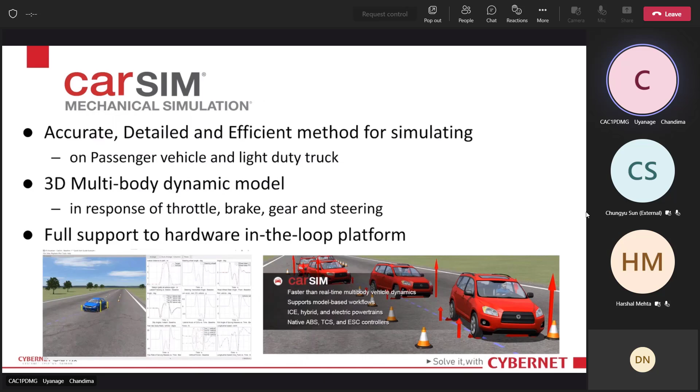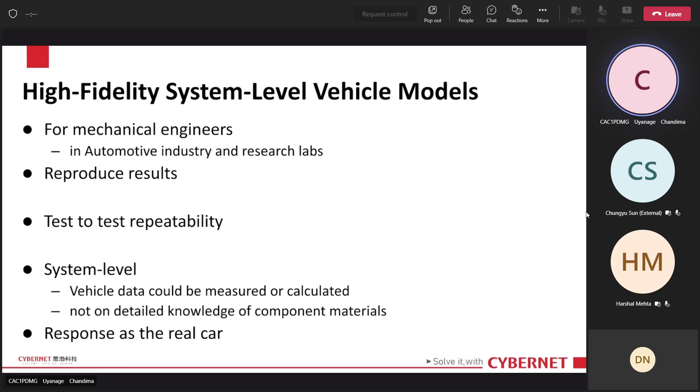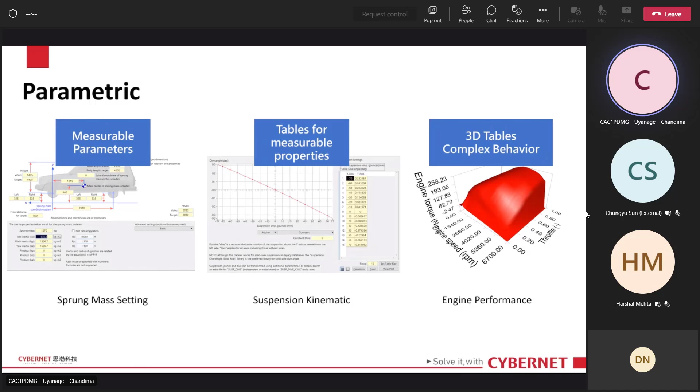Some of the measurable properties could not only be measured by real K&C rigs, but also by programs like ADAMS or SuspensionSim. As we have mentioned, CarSim is for system-level simulation. However, sometimes we have to build up the details of the component. We could use SuspensionSim to simulate the chassis response and import the results into CarSim. We could also duplicate the same testing scenario to validate the data we input to CarSim.

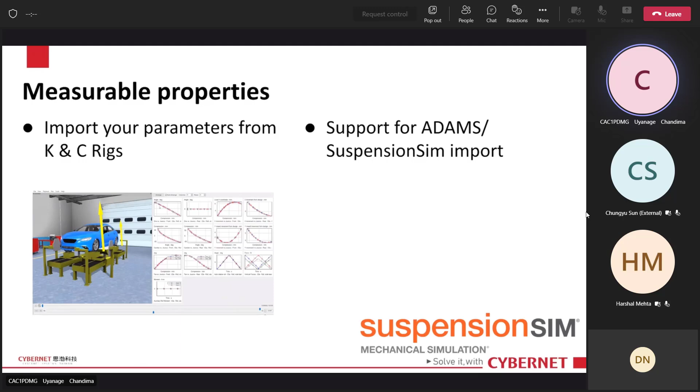CarSim supports almost all kinds of powertrain combinations, such as motor drive EV and hybrid EV. You could use CarSim to implement the powertrain setting and the testing scenario. Use the power management control to decide when to use motor and engine.

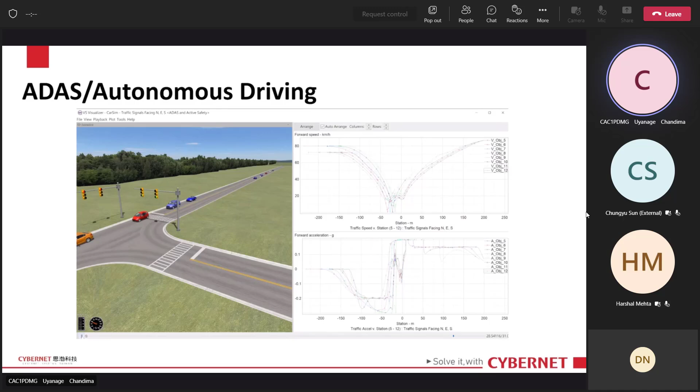CarSim comes with a database that has hundreds of simulations. We have 100 plus testing scenarios. We have about 40 plus vehicle data sets here that are based on a unique vehicle configuration. CarSim has extensive documentation like the help menu. Every screen has a help button. There are about 140 documents.

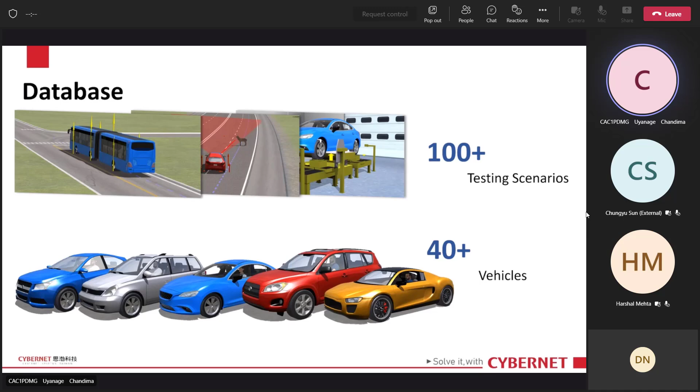Documentation is included in CarSim's reference manuals so that you can easily learn how to use VS Commands. We also have online videos on YouTube to show you how to script VS Commands. Events allow us to set up the scenario step by step, using pending events to trigger each step of your scenario. That could also help us to verify whether the test passes or fails.

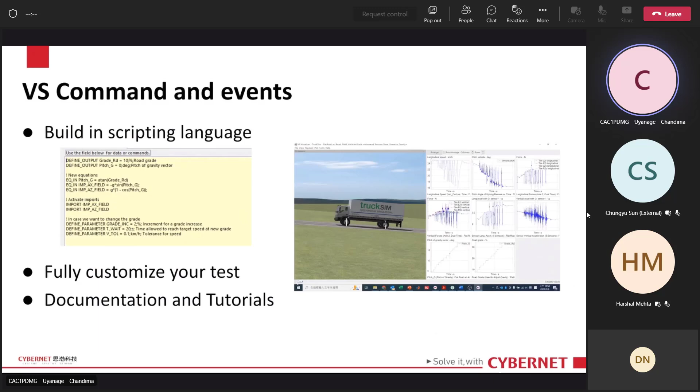CarSim, TruckSim, and BikeSim are used worldwide by over 100 OEMs and Tier 1 suppliers, and over 200 university and government research labs. There are more than 2,600 active CarSim seats, not including driving simulators or students.

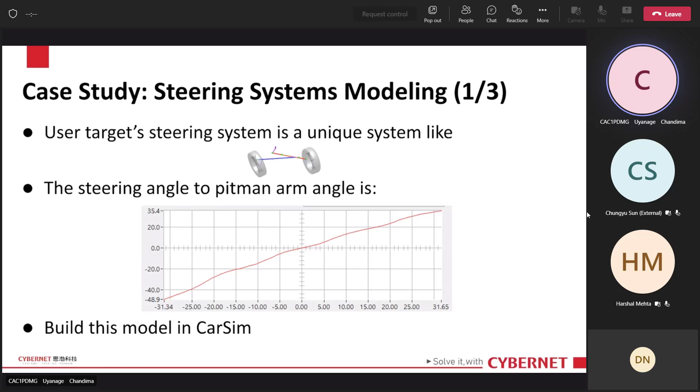After modeling, we test this vehicle with a vehicle dynamics test, a static steer test with brake on. The procedure is the vehicle is static with brake on, and we rotate the steering wheel smoothly. The brake will make sure that the vehicle will be static in the longitudinal axis, so that the torque in the axis will have a bigger impact.

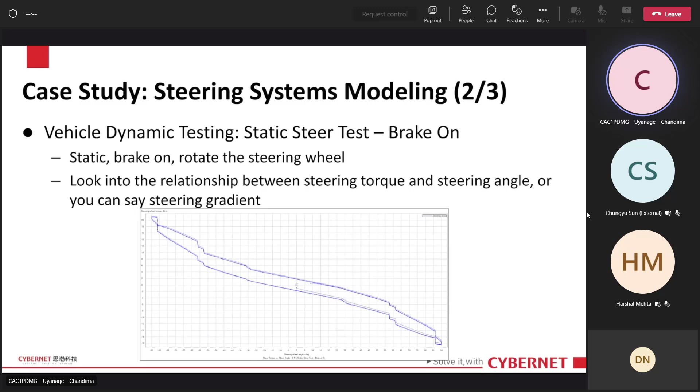You can see from this graph, the x-axis is the steering angle and the y-axis is the steering torque. The key point is the slope between steering torque and the steering angle. In vehicle dynamics, we call it steering gradient. The steering gradient will show whether the steering wheel is good to drive. As you can see, we have lots of rapid increases or decreases in steering gradient. This makes the vehicle hard to drive.

For a customer who is starting an autonomous vehicle, this helps them find the problem. They knew that the steering system was very hard to control for their controller, but they never found that the problem was from the bad steering system. We help users compare to their target, find this problem, improve it, and solve it. It helps them reduce the time in the end.

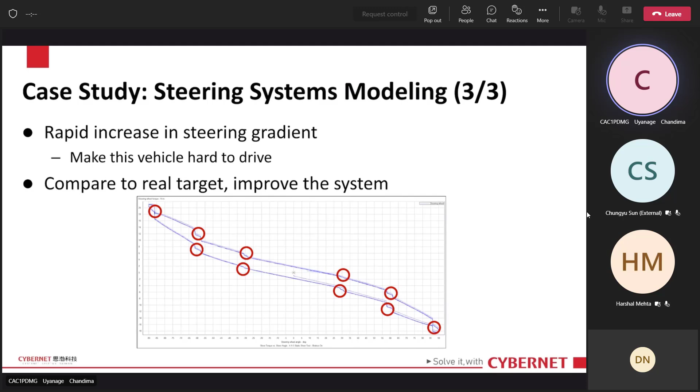The next case is the planning. Pirelli used CarSim to test a new tire model. There are two testing procedures: with the same distance to compare the fuel consumed, and with the same throttle command to compare the travel distance.

We can imagine that if we want to test this in the real world, we need two teams to maintain the vehicle condition, doing their best to make sure the vehicles show no difference except the tires. At the same time, these two vehicles will always have some differences. For example, the engine will differ since the mileage is different. The test environment cannot always be the same. Sunny day, rainy day, dry, or wet can have an impact on the testing result.

All of these variables can be controlled in simulation. We can have a totally identical vehicle except for the tires in CarSim. The simulation difference is fully a result of the tire model's difference. They use CarSim to save lots of human costs and vehicle maintenance.

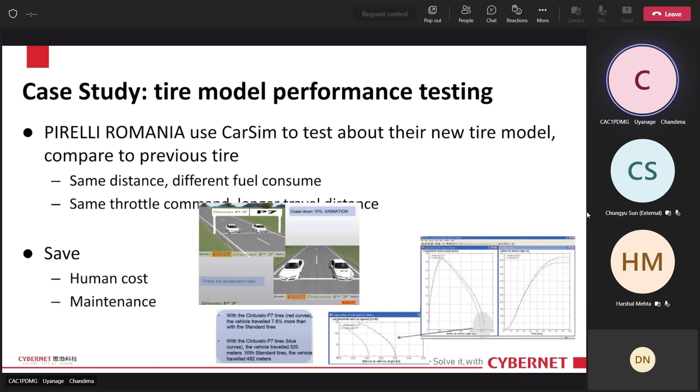What we have introduced in previous slides is software simulation. Testing a controller with software is something we call software in the loop. However, we still need to put our controller on hardware and test it with a real vehicle. Testing with real hardware is something we call hardware in the loop. It not only tests the control algorithm, but also tests the communication interface.

Before we dive into hardware in the loop, let me introduce model-based design. Model-based design is a method used in controller development and testing, based on the response of a plant model. It's also used in various industrial fields, such as aircraft, power grid, vehicle battery, and so on. Model-based design is used for product evaluation, system integration proposal, controller design, and development.

We can say that basically everything in the world can be a plant model. You could develop a controller using model-based design. Okay, now we have a new name, plant model. I will explain what a plant model is in the next slide.

What is the plant model? I assume that everyone here knows that force equals mass multiplied by acceleration. If I put a force on a mass body, it will have a specified acceleration. That mass body is our control plant model. If the model is accurate enough, we can know the acceleration value at any time. We can develop a controller to control the acceleration value based on the mass equation.

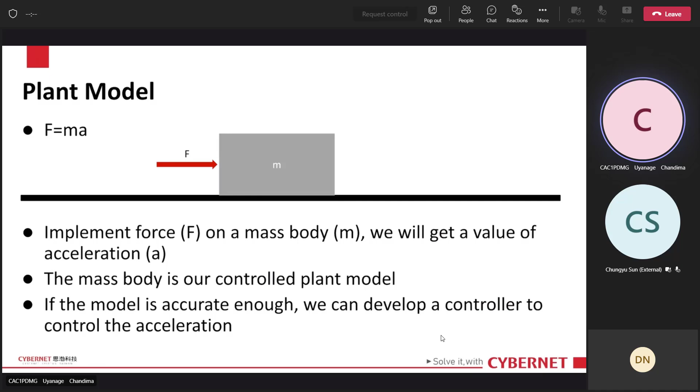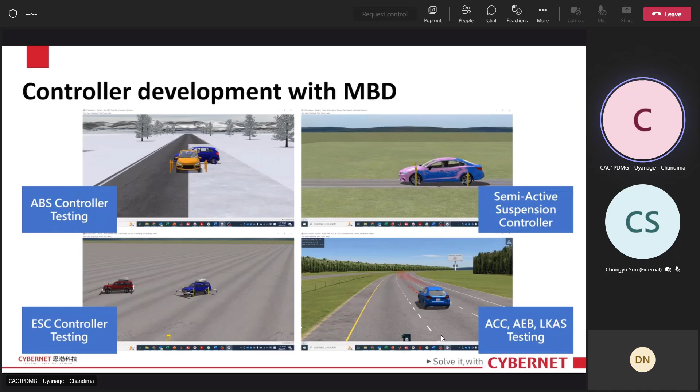By using model-based design in CarSim, we could build up a lot of controllers, for example, ABS controller, semi-active suspension controller, ESC controller, and ADAS controller. As you can see in the video, most of these controllers are required to be tested and pass dangerous situations: rollover, loss of control, difficult road situations, or obstacle avoidance. Controllers need to be tested in these situations to ensure performance. Using MBD and CarSim helps you test in the early stage with low cost and save money.

However, if we just test our controller in simulation, there will be some pros and cons. Of course, with simulation we could do control algorithm verification. The controller could be tested at a very early stage, and this is what we call software in the loop. However, the real controller has some physical limits. For example, the CPU has limited calculation power, and the sample rate is limited by both the hardware and the communication protocol. At the same time, a real controller will be impacted by noise. Automotive engineers should do lots of hardware testing to make sure the controller can be used on the real vehicle.

Now we have a full view of simulation versus real testing. For simulation, we have a safe testing environment. The testing is quick and can be done at a very early stage. Software in the loop is much cheaper than real vehicle testing and can be done in a lab, running 24 hours per day. However, some of the requirements are assumed ideal, like communication.

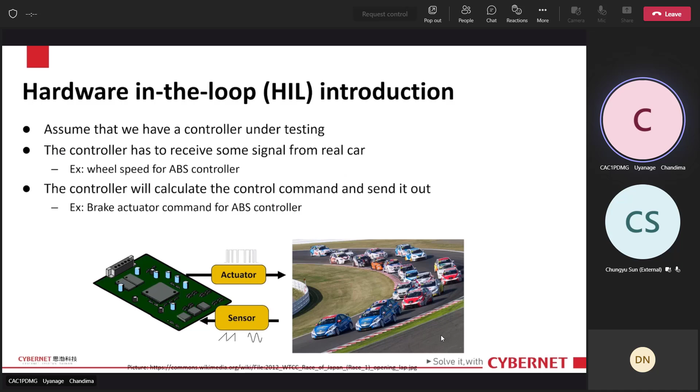The hardware in the loop, also known as HIL, is a controller design and testing method. Let's assume that we have a controller under testing. The controller has to receive some signal from a real car. For example, an ABS controller will have to get the wheel speed from a real car. Then, the controller will calculate the control command and send it out, just like the ABS controller will send out a brake control command.

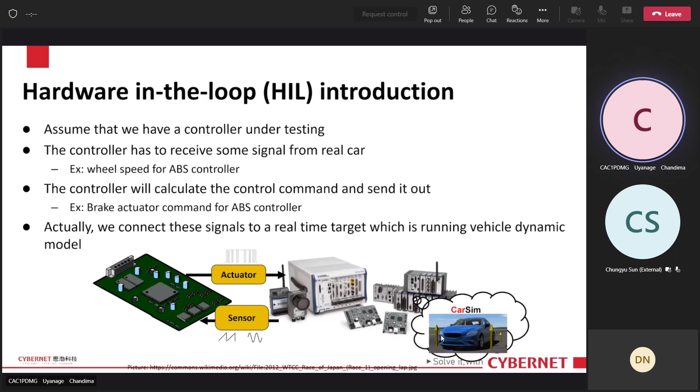The difference is we will connect these signals, inputs and outputs, to a real-time simulation platform, which is running CarSim. Now you might want to ask a question, why HIL? We could test the control algorithm in our computer, and this is why we have introduced the software in the loop. The difference is HIL considers more about the communication rate and the hardware performance.

For example, what if the controller works worse when the communication rate is slower than expected? What if our hardware has some faults and bugs? A real controller will communicate with sensors and other control units. It will receive data from the VCU and generate commands to the brake system. Different situations like high temperature, wrong connection to power supply, or receiving errors from other control units will change the behavior of your controller.

This kind of condition will probably happen only when you test your controller in a real car. And hardware in the loop can help you solve this problem at an early stage. The second question you might want to ask is, how can HIL do that? First, your system works in a real-time OS, which can make sure the calculation rate is the same as real time.

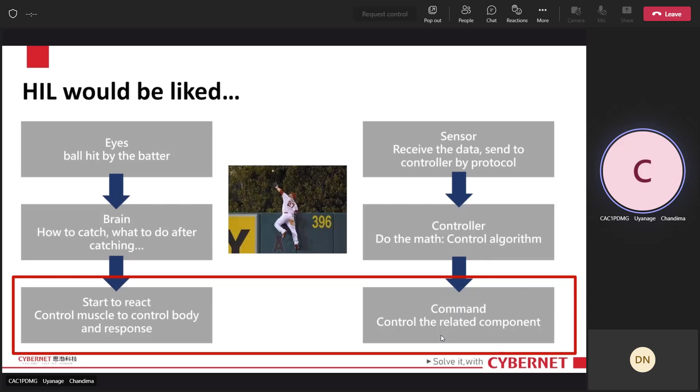All of these problems will probably not happen in software in the loop. Only if we use hardware in the loop testing can the problem be shown and be solved. That is the reason why we use hardware in the loop. Let's summarize hardware in the loop.

Hardware in the loop could not only help us implement our control algorithm, plant models, and run simulations, but also integrate the interface of sensor data and the control algorithm, so that we could connect our controller hardware to simulation software. In the vehicle application field, you could use CarSim and a hardware in the loop platform to test your controllers.

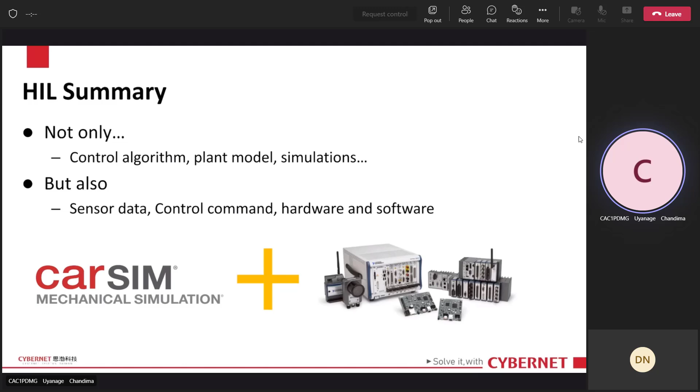With HIL testing, we can use the simulation tool in different kinds of application fields. We can develop autonomous vehicles by testing ADAS controllers via the HIL method. With CarSim RT and the sensor module, we can develop not only ADAS but also autonomous controllers.

Vehicle dynamics controller testing and validation can be implemented with different kinds of testing procedures. Chassis control, ABS control, or four-wheel drive control can all be tested with CarSim. We can do simulation at very low cost and reduce the time we need for tuning and verification.

We can also use the simulation tool to do subsystem testing. Sometimes we will want to evaluate different subcomponents on the same car. For example, which brake system is suitable for my target? We could build different brake systems in CarSim and test them with the same car.

Okay, so I'm going to introduce some user cases for you. The first case is for vehicle design. Our customer used CarSim's example as a template. CarSim has a PBS testing procedure as an example. Our user imported the vehicle model and used it to test the vehicle performance.

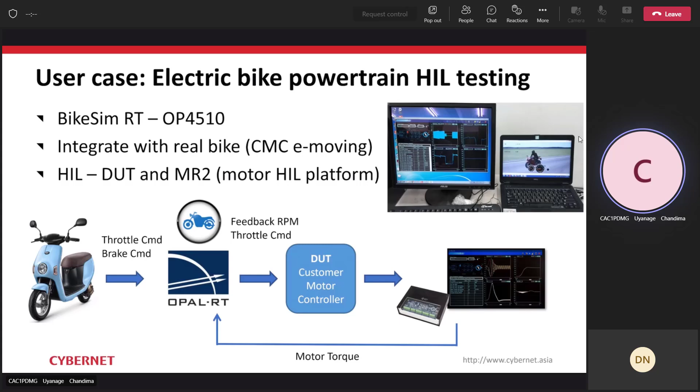Once the motor torque is sent to BikeSim, the bike in BikeSim will be ridden and generate a vehicle speed, which is going to be used to tension the motor. As you can see from the video, the engineer on your left-hand side will ride the bike. You can see the loading torque of the motor on your left, and the virtual BikeSim bike is ridden on your right. This is an EV powertrain system HIL testing.

In this case, we build up a dynamometer testing environment with CarSim RT. On your left-hand side, CarSim RT is used to generate a testing schedule. We use FTP75 in this case. CarSim's driver model will send the driver command out to the under-testing powertrain system.

After receiving the command, the motor will start to generate a torque in order to push the vehicle in CarSim and also the dynamometer. CarSim will calculate the vehicle speed as a result of motor torque. This speed is used as a command for the dynamometer. The dynamometer will transmit it to the under-testing motor to fulfill this testing system. Our user tests their motor control unit with this testing system. This can prevent lots of danger and cost because we can test it in the lab.

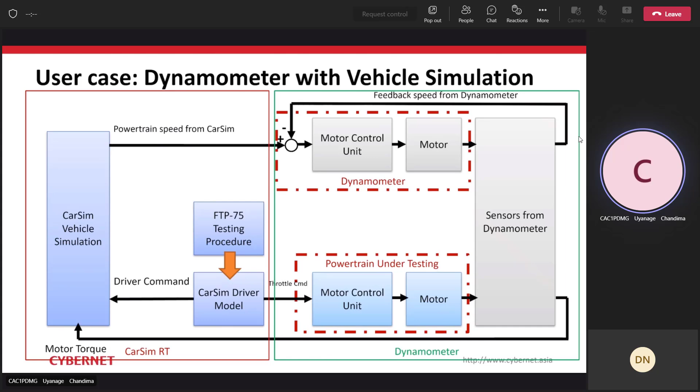The last example is a driving simulator. We built this driving simulator with CarSim RT, motion cueing, and a 6DOF motion platform. The motion cueing is going to implement the feeling of acceleration on the 6DOF motion platform. A real vehicle is running in an infinite world, so we will always have acceleration, velocity, and position changes. However, the motion platform works in a finite position. Every DOF has a limit. How can we use it to generate the result of a real vehicle? Motion cueing is used to solve this problem.

The idea is humans cannot sense changes with very low frequency. If the vehicle dynamic change is very low frequency, motion cueing will use gravity to compensate the feeling and put the motion platform back to the origin. That gives space to the motion platform for the next rapid movement. As you can see, when the vehicle is turning, the motion platform is moving to generate the acceleration feeling of the real car.

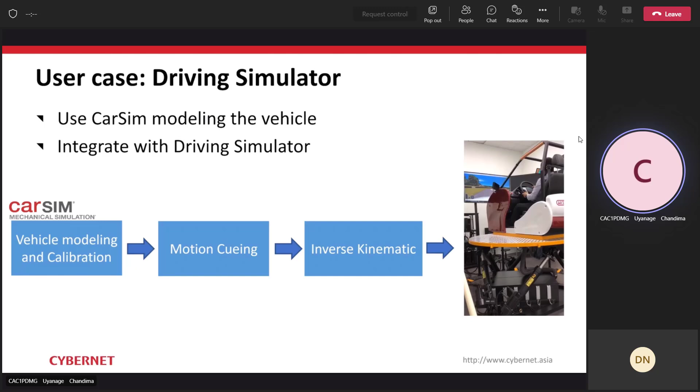Let's conclude today's topic. At first, we talked about vehicle dynamic modeling with the introduction of CarSim. We also talked about the controller plant model. Then, we introduced the hardware-in-the-loop testing method. Hardware-in-the-loop is an advanced testing environment. Automotive engineers use this testing method to decrease the cost of time, cost of human, and cost of money. All of this is to improve the efficiency of product research and development. That's all for today's topic.